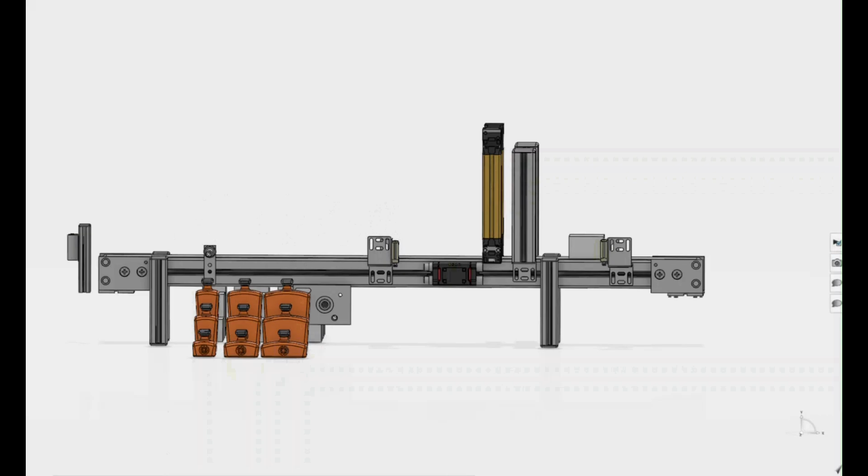Once upon a time, there was a kingdom called Cadmes. Cadmes had plenty of Dassault Systèmes software, which had useful tools for virtual commissioning and digital twins. Nearby was the kingdom of Omron. Omron produced hardware for manufacturing, like PLCs and sensors, among other things. They both saw a problem.

Virtual commissioning and digital twin technology was taking the world by storm, but they knew small and medium-sized enterprises, particularly those that build machines, were being left behind. Marcel from Cadmes said, "My biggest frustration is that I'm never able to show a practical example which you can touch, see and smell to my audience during my presentations. I only have a small 7-second video of a PLC with some blinking lights to say, look, this is virtual commissioning."

Thanks to these problems and more, these enterprises thought this technology was not useful. It seemed too expensive, would take too much time and training to implement, and looked unachievable, all for little benefit. The whole thing was simply too mystifying to be believed.

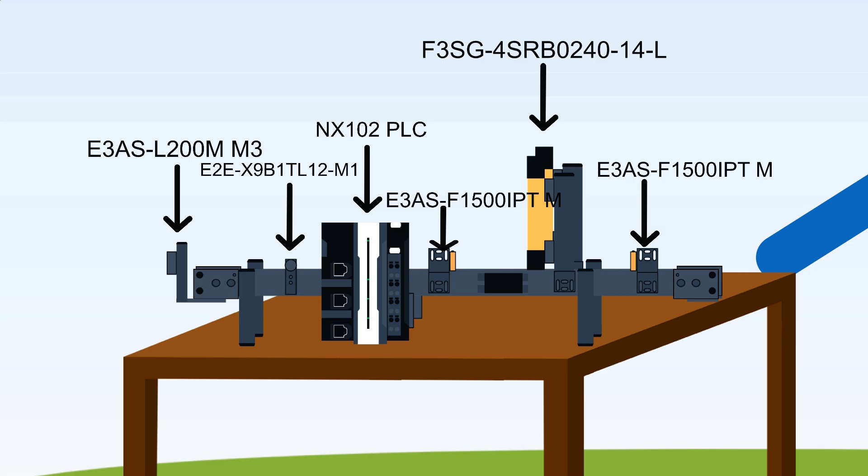So Cadmes asked a student from Fontys to help prove that digital twins are useful and not too hard to make. Omron loaned her a small conveyor system with a PLC and sensors that are familiar within the industry. Cadmes gave her access to the software portfolio with all the great tools for virtual commissioning and building a digital twin. But how to connect it all together?

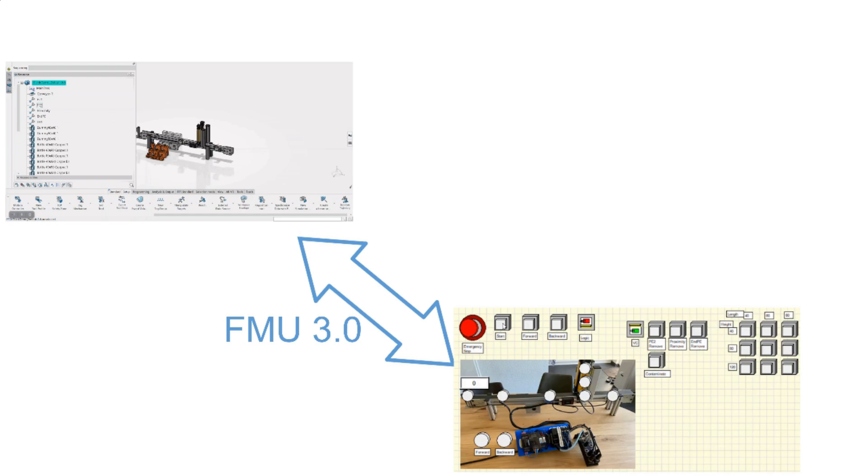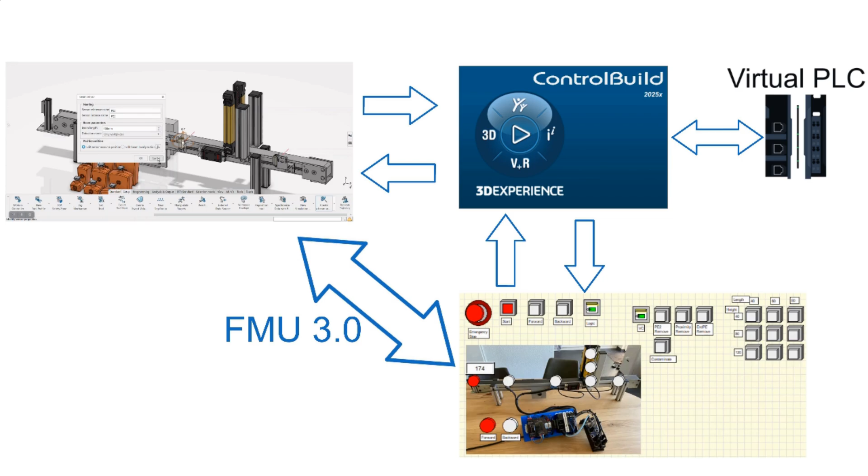First, virtual commissioning was set up. The 3D model of the conveyor belt was uploaded to 3DEXPERIENCE and the behaviour of the belt and sensors was modelled. This was connected to Control Build with an FMU, which would allow co-simulation between the two through the Control Build shared memory. Then, Sysmac Studio was also connected to the Control Build shared memory to act as a virtual PLC and control the simulated hardware.

Next, ways to connect the hardware and software for a digital twin were investigated. The first method the student established was using a Mosquitto MQTT broker. This open source broker was used to connect the PLC I/Os to the Control Build shared memory. This, when running with the co-simulation, made the digital twin. Once set up and connected, the needed I/O communications are bidirectional and automatic.

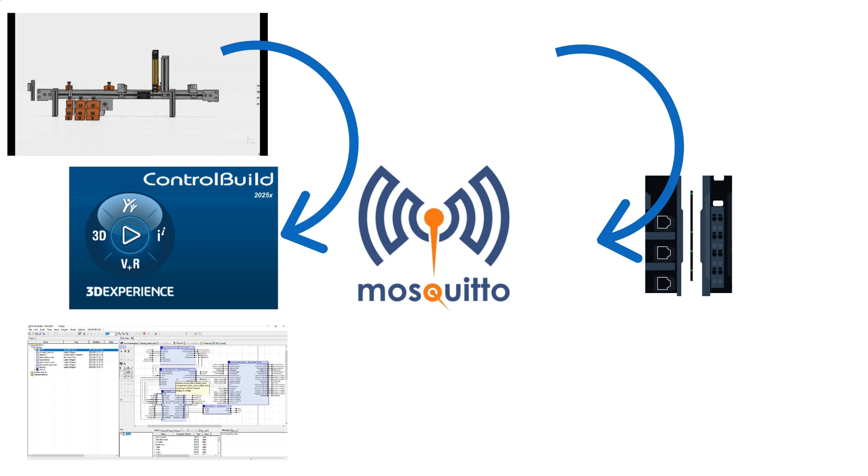This was nice, but to better tailor this to different SMEs, different methods should be investigated. The student kept looking. She then tried with OPC UA, a prevalent standard for modern PLCs. Like the other two systems, it used the 3DEXPERIENCE Control Build co-simulation. This was connected to the OPC UA server on the PLC through the Control Build shared memory. Through this connection, the digital twin was made once again. Communication was still bidirectional and automatic.

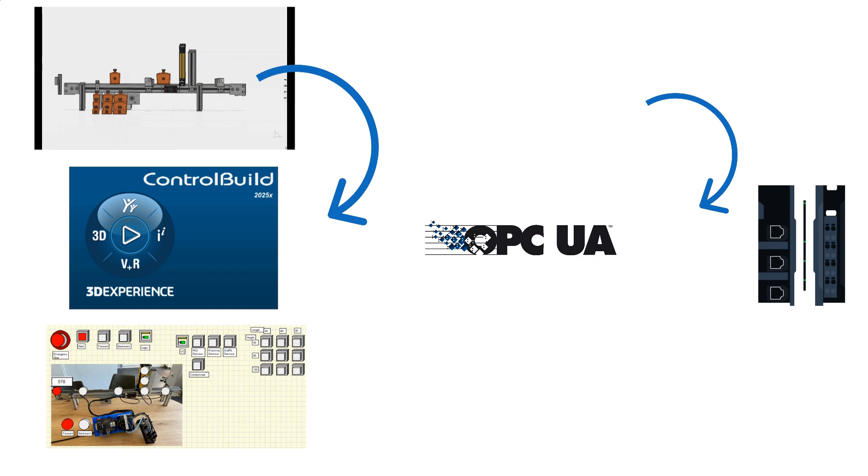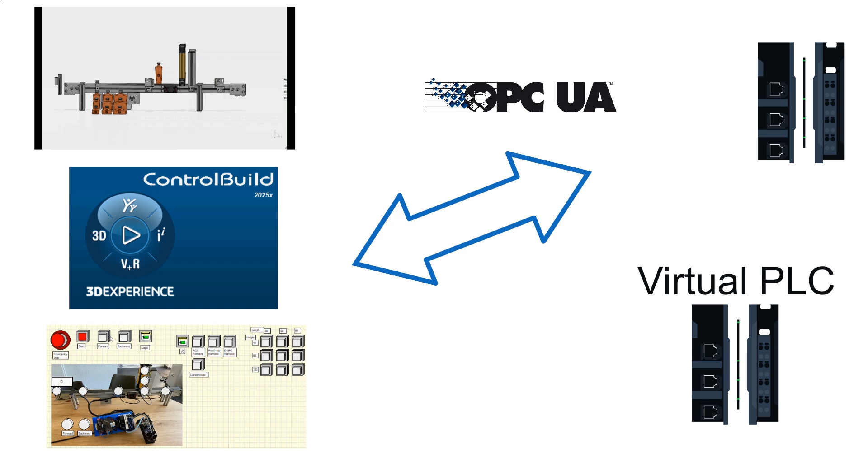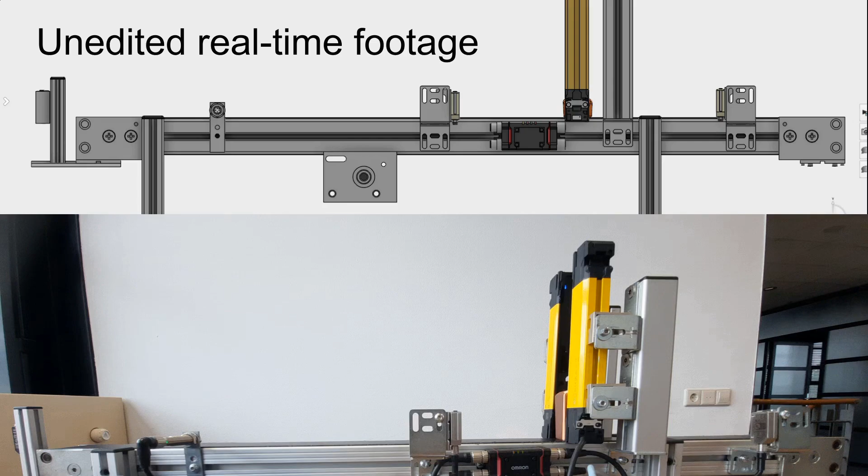Another bonus of using OPC UA was shown. When using the virtual commissioning method already found, the PLC program can be directly uploaded to the hardware and used without the need to make modifications. The demo would detect the length and height of the object and show this in the digital twin. All the while, the position was shown accurately to the real world. Finally, objects contaminated with metal would be detected and stopped before the end of the line.

They had done it. Not only did they have easy processes, but it also did not require any customized hardware or software, and only needed PLC programming and simple simulation setup. This meant that they could prove to SMEs that they wouldn't need to make costly investments to change their working methods and existing hardware to start feeling the benefits of digital twins and virtual commissioning.

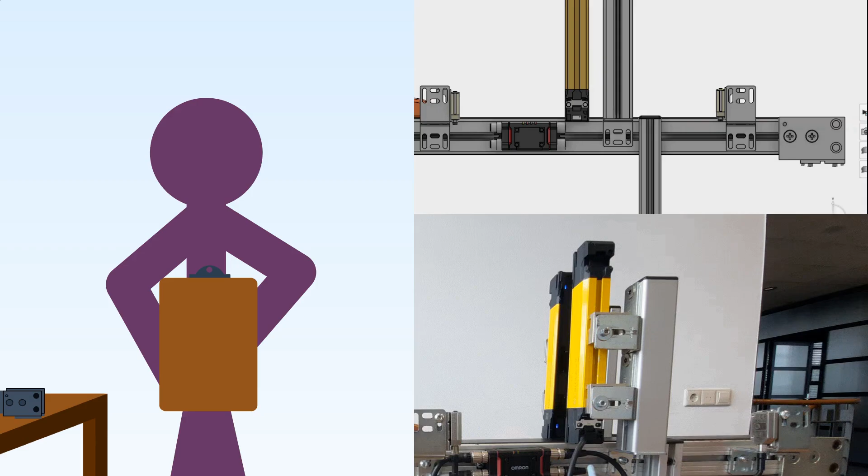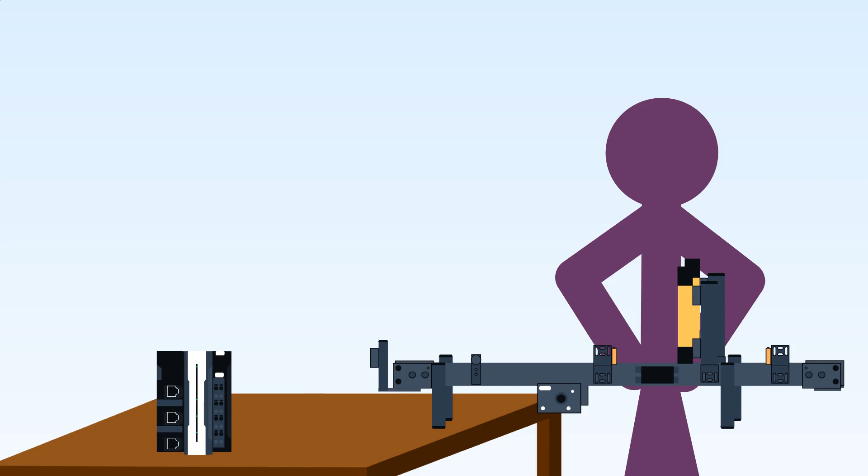The student had also been very careful to document each step of the way and write up various how-to guides which could be shared with the SMEs. Helpfully, this demonstrator was small and easily portable, so it could be taken directly to the SMEs to see in person. Just be careful of the wires.

Michiel from Omron said, "This demo offers a unique and highly effective way to showcase the added value of digitalization for machine builders and OEMs. By demonstrating the digital twin directly on site at the customer's location, we can bring both the physical and virtual twins together at the same table. This approach creates a tangible link between digitalization and real-world machine applications, something truly impactful and unprecedented." The end.